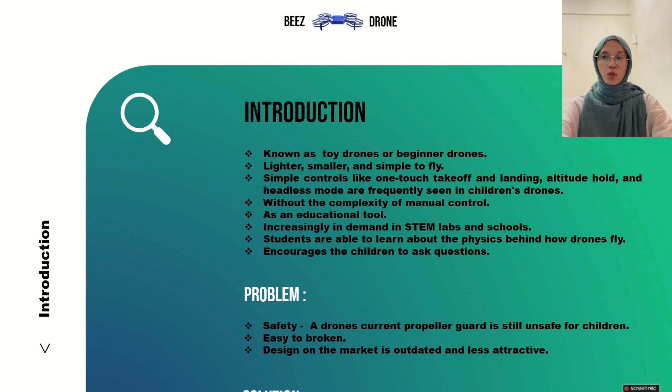But since this drone is designed for children, safety is an important thing that users will look for. Even though current drones mostly use propeller guards, it's still unsafe for children. In addition, children and beginners have difficulties flying a drone since they are still learning. Therefore, the drone might easily fall and break if the material is not strong enough.

The design of drones on the market is also outdated and less attractive. Thus, in this project, we would like to improve drone safety so children could crash the drone without worrying about breaking it quickly or damaging furniture. Our team also would like to improve the design to become more aesthetic and develop a few new features into this drone.

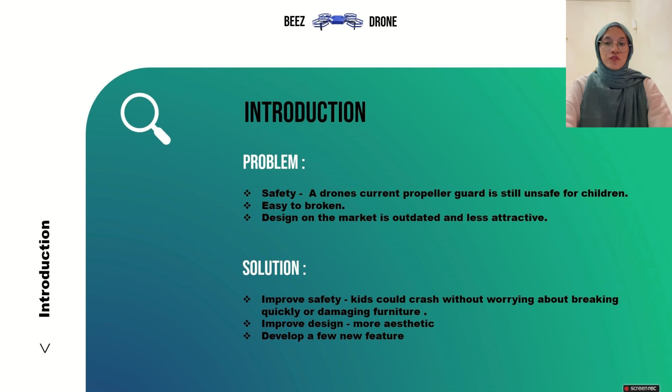Product planning and identifying customer need. Identification of opportunity: there are 4 steps to identifying opportunity. First, we do interview and market survey.

Second, we do observation through the experience of our own team members, because I myself also don't know how to fly the drone. The third is development and team benchmarking, and the fourth is evaluate and prioritize activities.

Mission statement: our product specification is that we want to make a drone that is detachable, has hand gesture control, is a safety drone, has rechargeable battery, and uses durable materials. So our key business goal is to inspire kids to explore new knowledge since young.

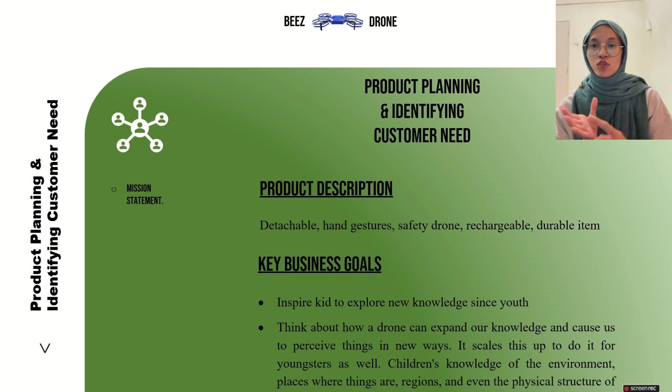Our next key business goal is to think about how a drone can expand our knowledge and cause us to perceive things in new ways, and scale this up for youngsters as well. Children's knowledge of the environment, places where things are, regions, and even the physical structure of the planet can all improve once they get interested in what a drone has to offer.

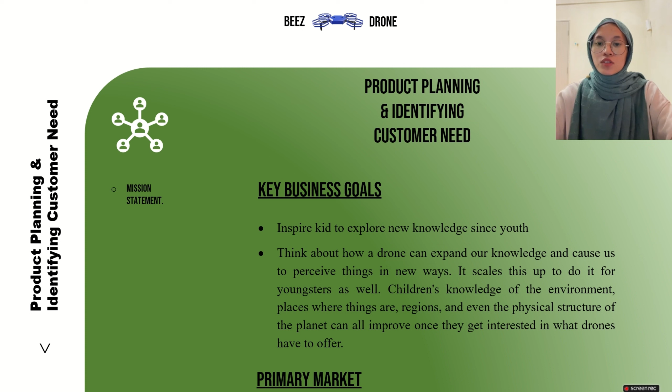So our primary market is kids stores, for example like Toys R Us. And our secondary market is online platforms such as Carousell and local classified garage sales.

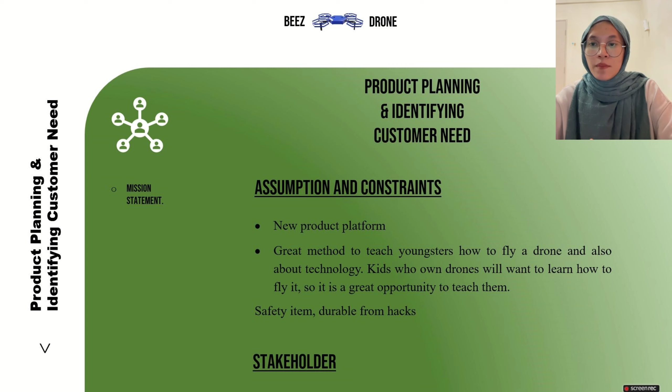Our assumption and constraint: we want to make our drone a new product platform and a great method to teach youngsters how to fly a drone and also about technology. Kids who own a drone will want to learn how to fly it, so it is a great opportunity to teach them. And we want to use safety items durable from hacks.

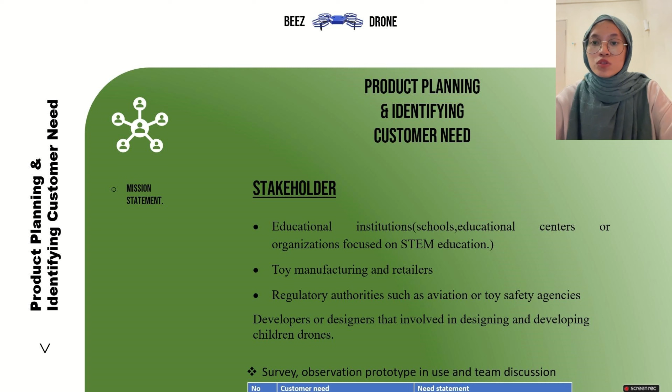So our stakeholders are educational institutions such as schools, educational centers, or organizations focused on STEM education; toy manufacturing and retailers; regulatory authorities such as aviation or toy safety agencies; and developers or designers involved in designing and developing children's drones.

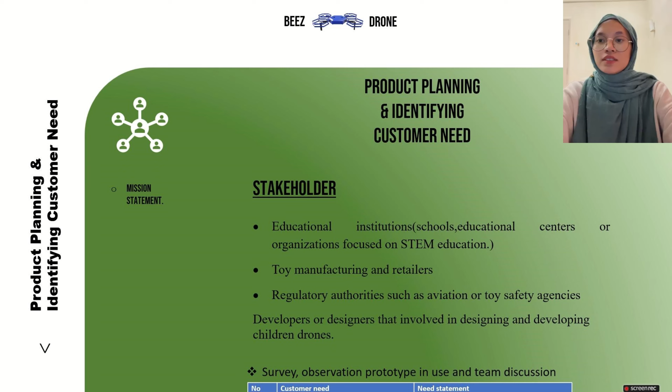Customer need and need statement: we got this from conducting a survey, observation, prototype in use, and team discussion. There are 7 customer needs and need statements that we got. Basically, customer need is actually what the customer wants, and need statement is the actual solution for the customer need.

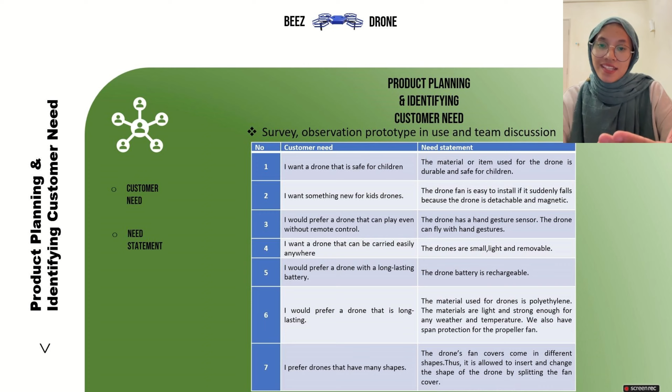House of quality: this is actually a tool for a team to prioritize design choices, comprehend the link between technical requirement and customer expectation, and make sure the final product or service meets those requirements from the customer needs that we get from the survey.

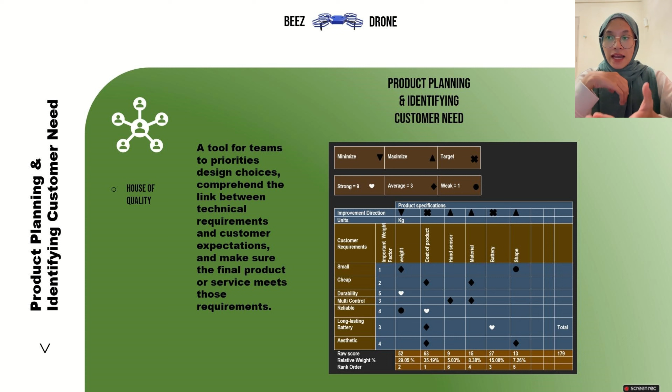Our customer requirements are small, cheap, durability, multi-control, reliable, long-lasting, and aesthetic. Based on all of this, we need to rank how important each is. We put the symbol of a heart as 9 to represent strong, a diamond as 3 to represent average, and a circle as 1 to represent weak.

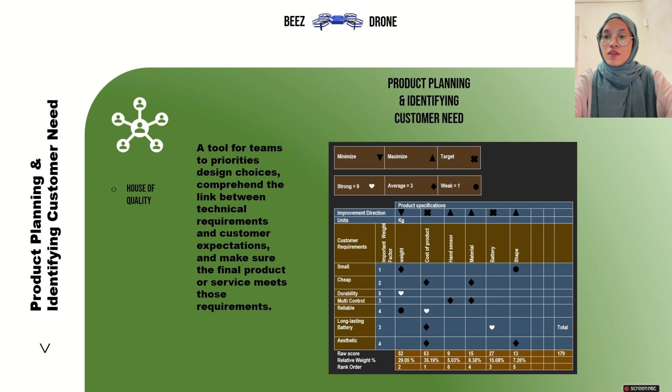So from the raw score, cost of product got the highest raw score, which is 63, therefore cost of product will be at rank number 1. The lowest raw score is hand sensor, which is 9, therefore the rank order for hand sensor is 6.

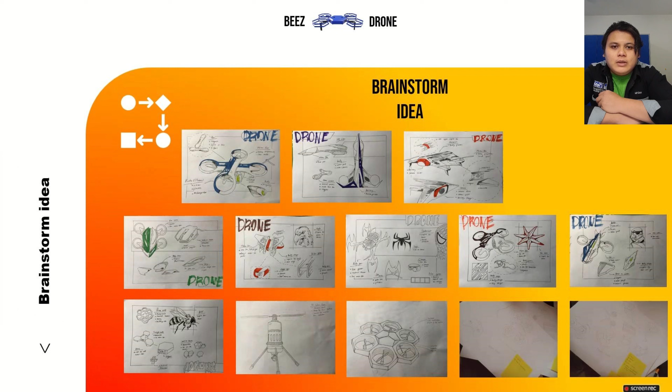We collected 2 ideas, jet drone and bee drone, to develop into 3D. Here we talk about our rejected and accepted product. You can see we have 6 development ideas using 3D, and all of these are rejected ideas.

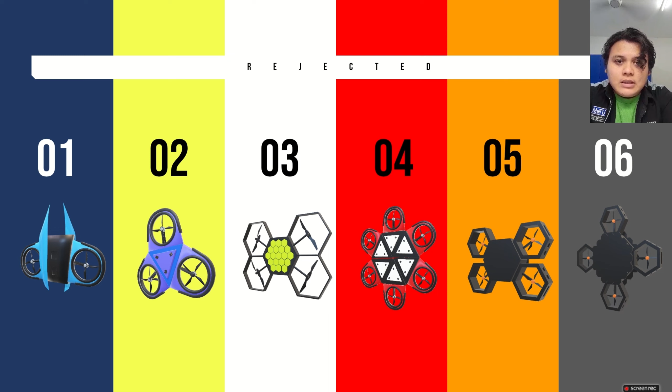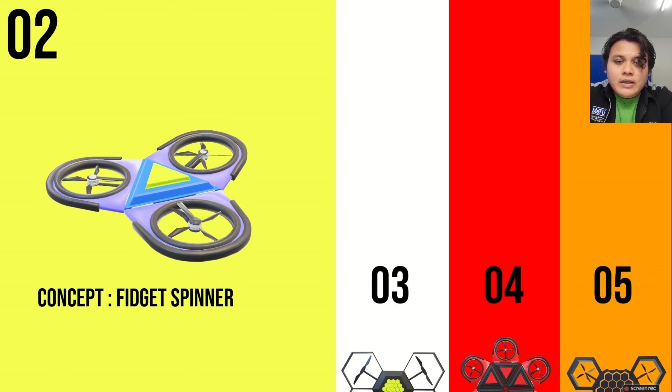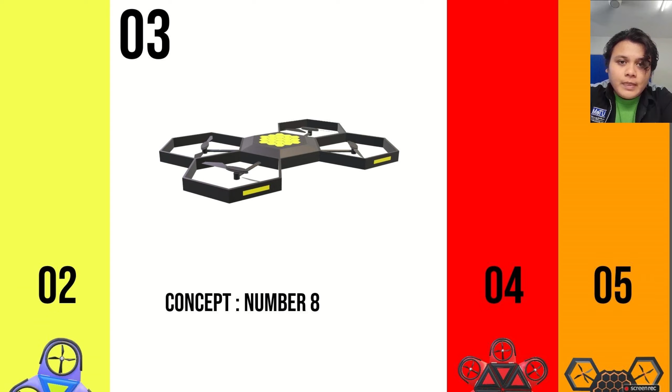For the first one, we use 2 motors for our drone. The second one uses the concept of a fidget spinner, which has 3 motor fans. The third one we try to put the honeycomb concept, with detail in the honeycomb on our drone. The fourth one, you can see, we give 6 motors for this idea.

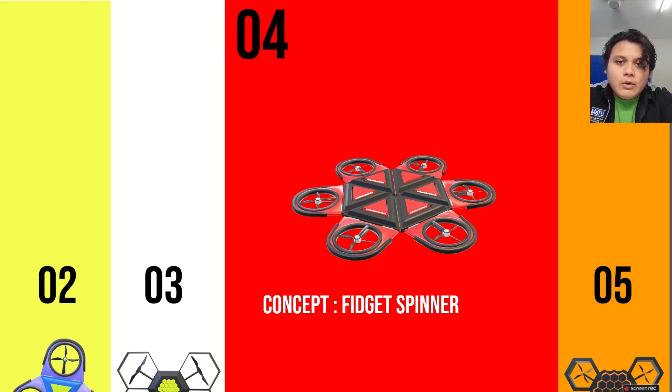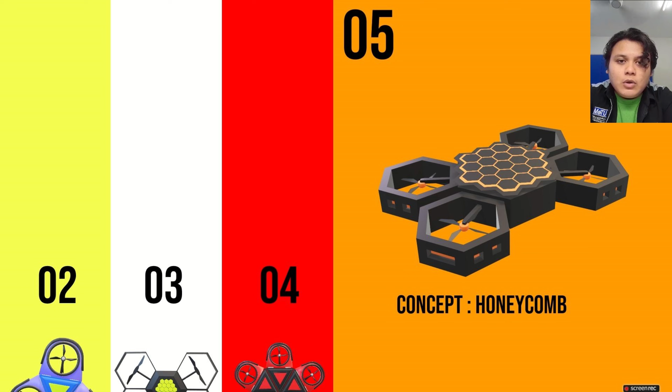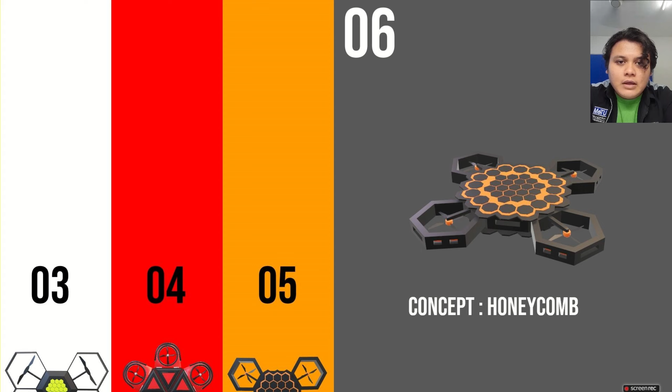We try to make the fence shape with a circle, then move to ideas 5 and 6, where we detail and compare which one is better. For idea 5, we use the honeycomb concept with LED lights on top and bottom. For idea 6, we use an 8-angle design, a bit different from 5, also using the honeycomb concept.

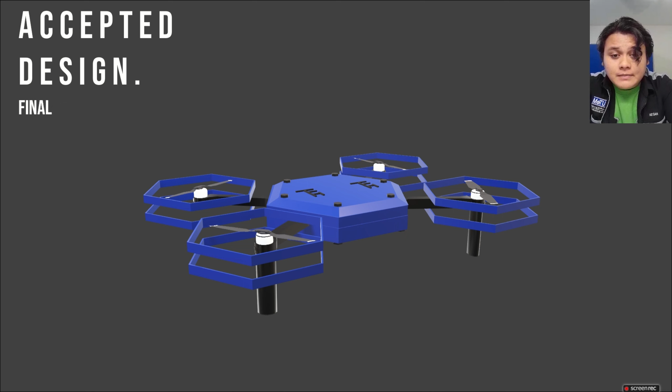Here we finally come to our final design. As you can see, our product has a honeycomb concept for the design, and the propeller is also hexagon shaped, close to the honeycomb.

What we have in our drone: first, we have a hand sensor, which allows the drone to fly without a remote, but the drone also has a remote, so it can fly in 2 ways - first with the hand sensor, and second with the remote control.

Our drone's propeller shape can be changed. We gave three different shapes: first, our main shape is hexagon, the second is circle, and the third is square.

Then I will show you our exploded view. Here you can see we have two LED lights, the motherboard of the drone, and also a chip for the hand sensor.

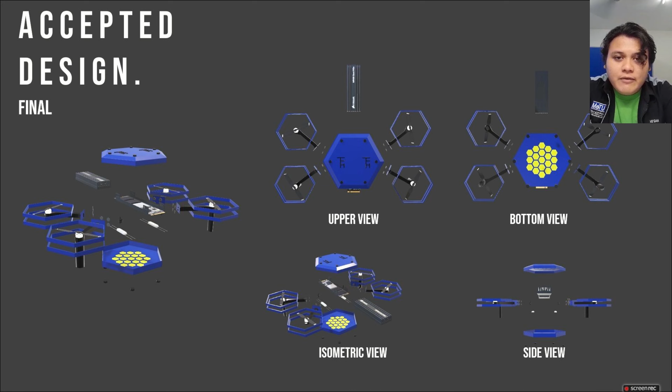For the propeller, we use magnets, so the propeller and motor fans can be split apart from the body. For the material, we use plastic and a little bit of fiberglass. You can also see the side view and upper view with our exploded view.

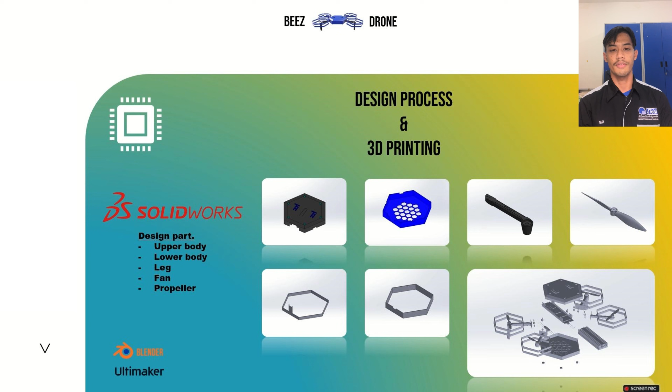After all the parts are clearly done, we save the file into an STL file to transfer to Ultimaker for the 3D printing phase. Next, in Blender, we create the animation, rendering pictures, exploded view, and develop our sketch into 3D.

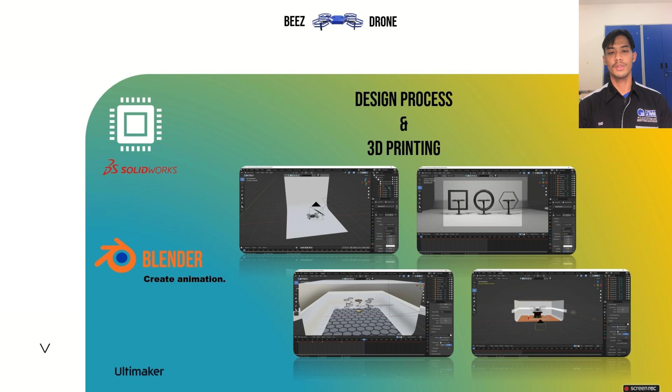The 3D animation, rendering picture and exploded view we create from Blender is for the slide presentation. We save the file as a GLB file, so when imported into the slide presentation, we can view it in 3D isometric - front view, side view, upper, lower view and isometric view.

The last software is Ultimaker. We use Ultimaker Cura with the Ultimaker 3 model to generate the part into a real product part.

Our first output part generated by the machine was broken because the machine malfunctioned while printing, and that part was rejected entirely. But we launched a second print and got the machine working fluently.

After that, we got the product output clearly printed with no defects or errors. We used the machine until all our products were completely printed as well.

And the last part is the closing, the conclusion. In conclusion, the drone project's purpose was to design and create a versatile unmanned aerial vehicle, UAV, with an emphasis on its performance, functionality and reliability. The project involved careful consideration of problems such as choice of appropriate material, benchmarking performance metrics, and complying with relevant regulations.

Thus, our project drone outcome was successfully installed and working as desired, with a stable position and easy to control. And that's all, thank you.